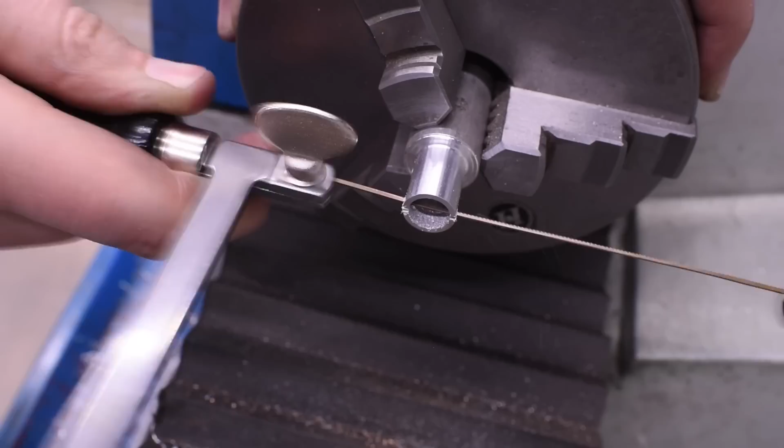This is either genius or stupidity. Where are you going to put your money down? It's stupidity, isn't it? Fine, I guess we'll see.

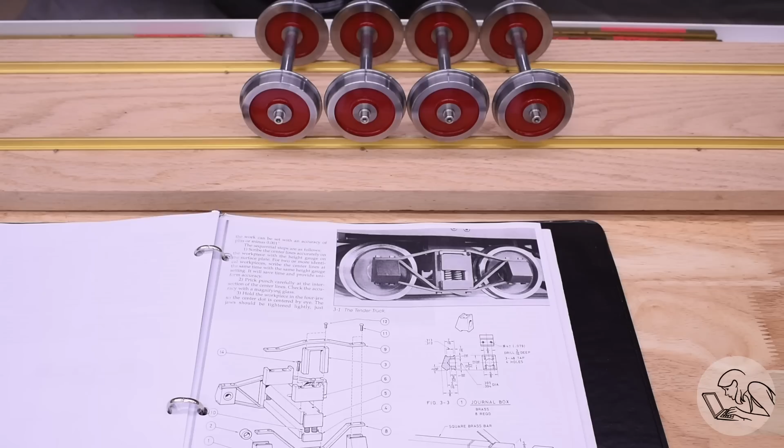I'm back on the Pennsylvania A3 switcher this week, and I'm continuing the journey towards a rolling chassis for the tender. So, let's go. With the wheel sets done, it's time to work on the trucks. Now, I believe the Brits would call this a bogie, which is probably a better word for it. It's the assembly that holds the suspension and the axles and the wheels together.

Here in North America, we call it a truck, which is perhaps unfortunate because we also call this a truck and this a truck and this a truck, and well, sometimes it's a verb. So, we like to overload words over here.

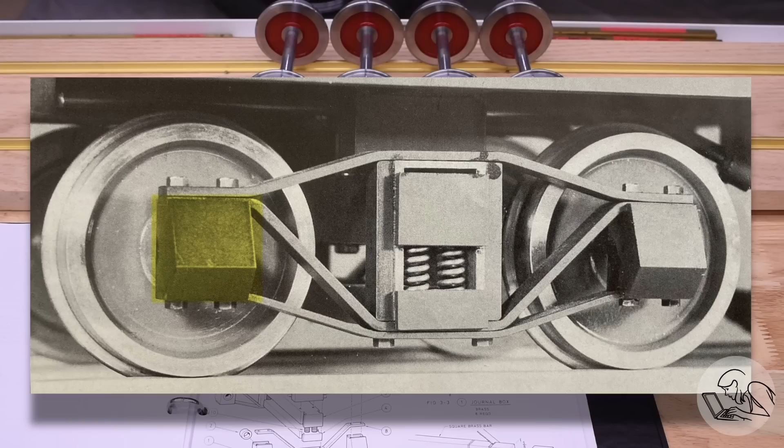I'm going to start with the journal boxes. They look like this. It's basically a box that holds the wheel bearings on a typical railroad car of this era. Now, these ones are mostly decorative other than being structural. However, on the real thing, they would be boxes that you could use to access the bearings for greasing or oiling. They might have an oil reservoir in them, that sort of thing.

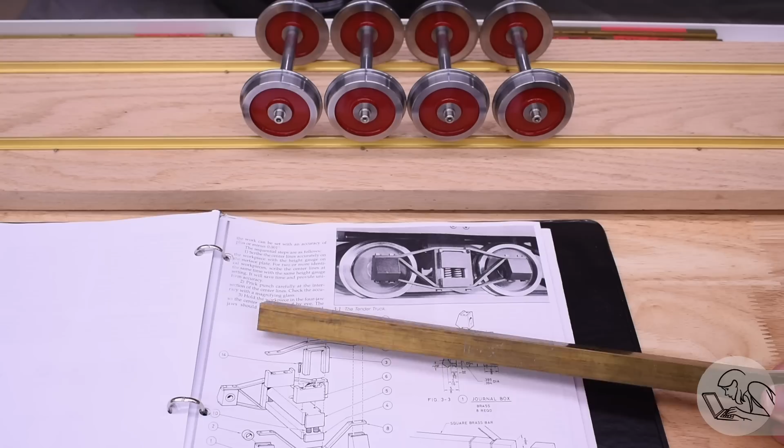I've got this brass square bar for the purpose, and we need 8 of them, of course. I'm going to say it'll be nice when the tender is done and I can stop making 8 of everything, but we're still in that world, so here we go. I'm going to rough cut 8 of these pieces on the bandsaw, and then they will need to be machined down to an accurate length over here on the milling machine.

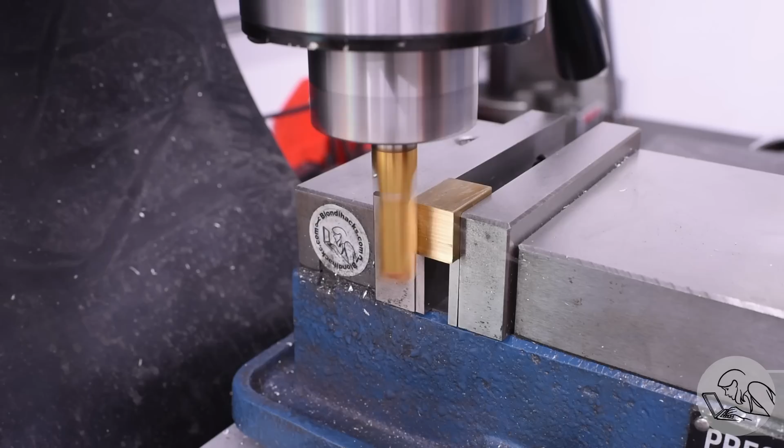Since I am still in the land of making 8 of everything, I'm going to be doing a lot of this sort of thing. I've got an end stop set, so after machining one end of the first piece, then I machine the second end of that first piece down to an accurate dimension. Once this piece is machined down to the exact right dimension, I can just zero the DRO right there and then run all the other pieces through. So I only have to measure the first one.

I have to sneak up on the dimension and take my time on the first piece, but then the other 7 go very, very quickly because it's just a case of facing one side, put that side on the end stop, flip it around, and machine the other side down to 0.

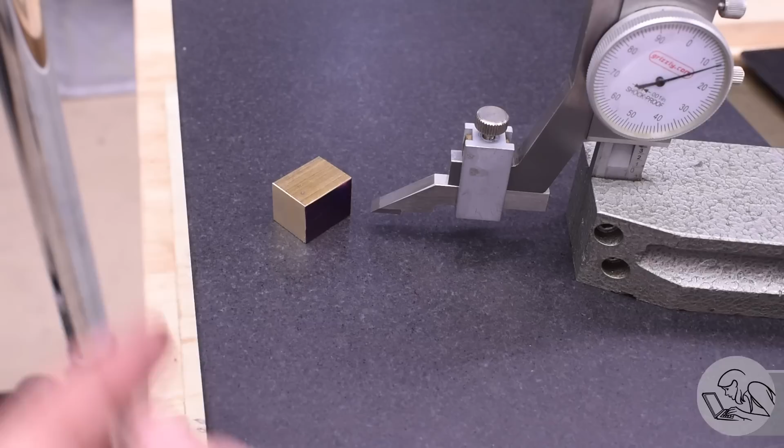Next is the bore for the bearing. It's a shallow blind hole, and this goes on the center of one of the long sides. So to mark the center of each of the long sides, I've got my height gauge set to half the distance of the short side, and I mark one axis of the center line on all 8 parts. Once again, trying to minimize tool and instrumentation changes.

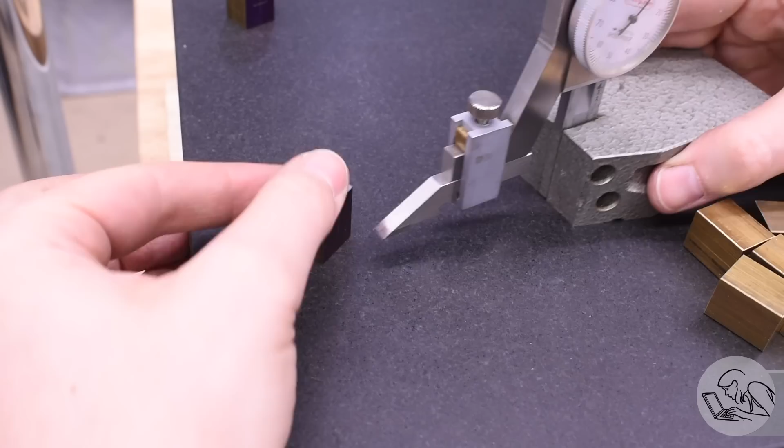Then I set the height gauge to half the long distance and run that through all 8 parts. This is a quick way to mark the center of all 8 parts. I really enjoy surface plate work, and I love any excuse to do it. To punch those center marks, I'm going to use an optical center punch. This is something I've had in my drawer for a long time. A viewer donated it to me, but I haven't used it a whole lot, so I thought it would be fun to give it a whirl here.

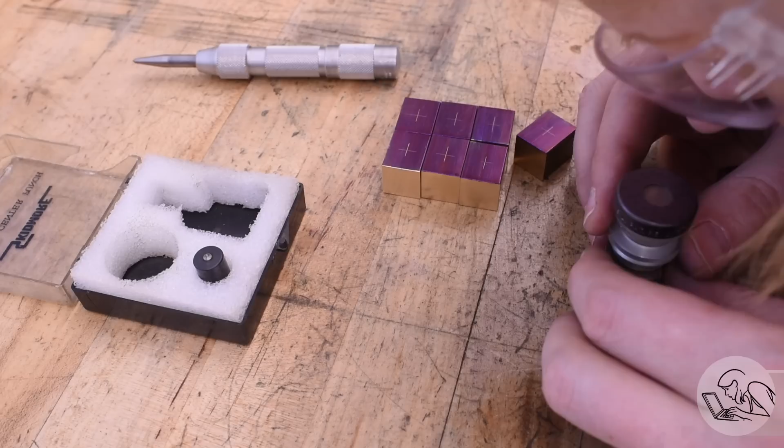The way these work is there's a collar that holds an optical loupe, as you see there, and inside that loupe is a crosshair. And the idea is you put that crosshair on the center of the scribe lines that you've marked. Here you can see what that looks like inside the lens. The white cross is the scribed marks on the piece, and the black cross is part of the loupe. So you line up the black cross on the white cross.

Essentially, you fill in the white lines with the black lines, and that loupe is now perfectly centered on your scribe marks. Then, trying not to move the collar, you carefully remove the loupe. This is easier on ferrous parts because the collar is magnetic. Then you insert this little transfer punch that the kit comes with, give that a tap, and now your center is marked. This is intentionally a light-duty tap, so it's just a starting point, but it should be very, very accurate.

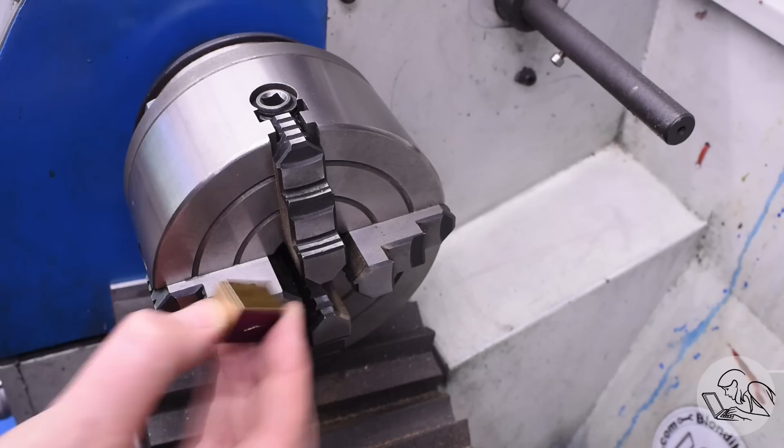It's trading accuracy for power. Then you deepen that punch with something like a spring-loaded center punch, and now that's ready to use. So I ran through all 8 parts to find the center that way, and now I can put them up in the lathe and get ready to do the bore.

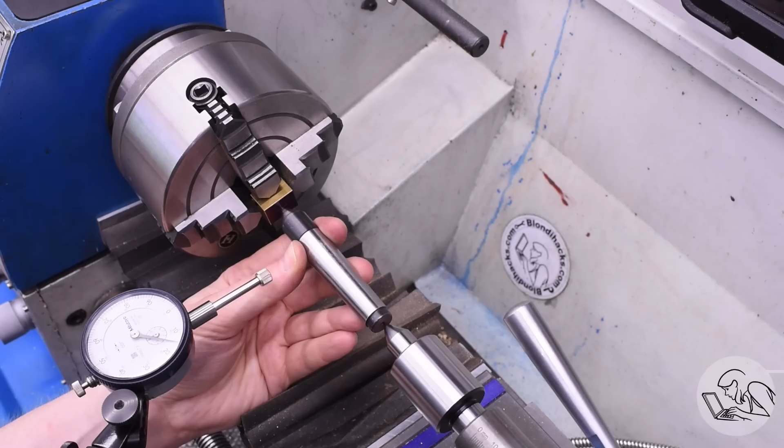Now I need that center punch on the center axis of the lathe. For that, I've got my dead center, which I put in the punch mark. I hold the back of it with my live center, and then I can dial in the dead center just as though it was a round piece of stock in the four-jaw. This is a simple technique for centering a punch mark that works extremely well. You'll see as it spins up here how well that punch mark is centered.

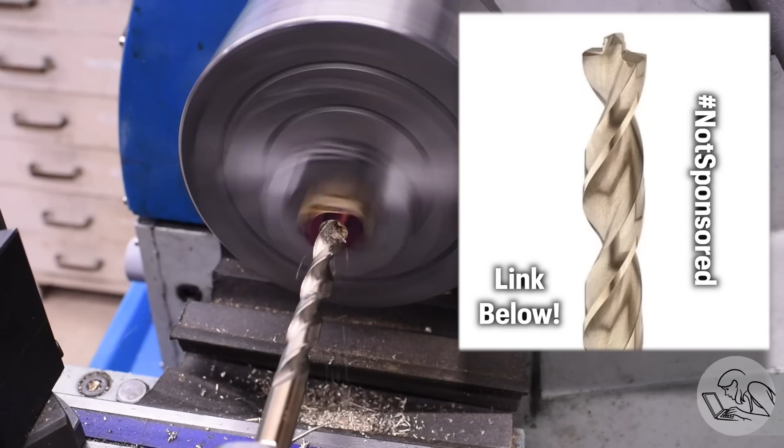Now I can center drill and then drill out this counterbore that we're going to be forming. Now for the drilling, which is to remove the bulk of the material and make room for the boring bar, I'm using a very special drill. This is a DeWalt Pilot Point drill, which has a mostly square grind on the end. These things are great for starting flat-bottomed blind holes because they have that square grind on them and they really save you a lot of work with the boring bar.

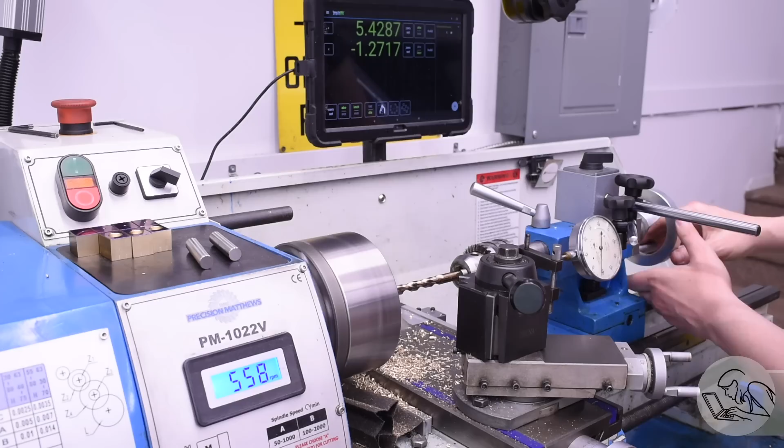Drilling depth is super crucial here, so you see me using an indicator on the tailstock quill to make sure I get my depth really accurate. And then it's just a matter of coming in with the boring bar and cleaning up that bore, bringing it to dimension. We also gain all of our concentricity back that we may have lost with the drill by doing this.

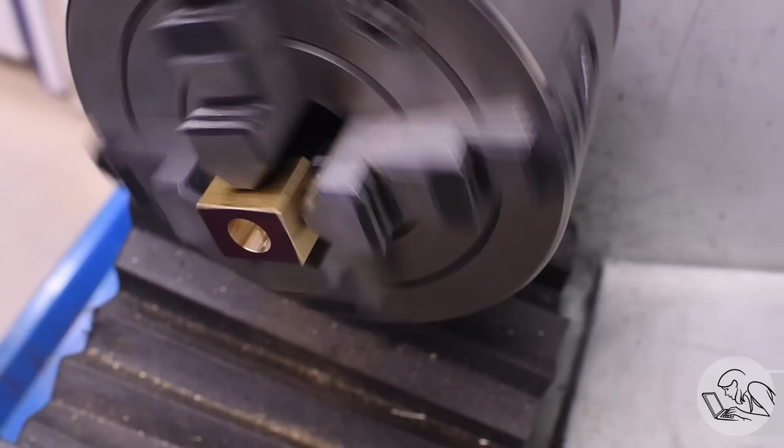Tolerance is very tight on these. They have to be accurate, so I'm using gauge pins. I have a couple of sizes leading up to the dimension that I want, and I'm taking light cuts with the boring bar and checking with my series of gauge pins, working my way up to the final dimension until I get a nice, comfortable fit on the dimension that I want.

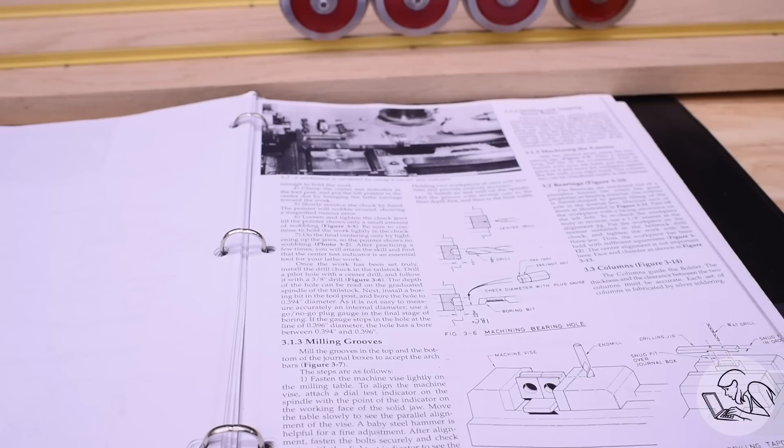And then, of course, as you know by now, I then have to do this 7 more times. There's the 8 journal boxes brought to this point, and now we're going to be spending some quality time over on the milling machine. The next features to do are grooves top and bottom for holding the arch bars. That's part of the structure of the truck. I'm going to do this on the mill, of course.

I've edge found on the back edge only. That's the only reference I need. Referencing from the back of the part is a conscious choice because that's the fixed jaw of the vise then that you're referencing effectively, and that will ensure maximum repeatability between parts. Again, when you're making 8 of something, that does matter. And I've got an end stop, of course, although for this particular feature, the end stop isn't strictly necessary.

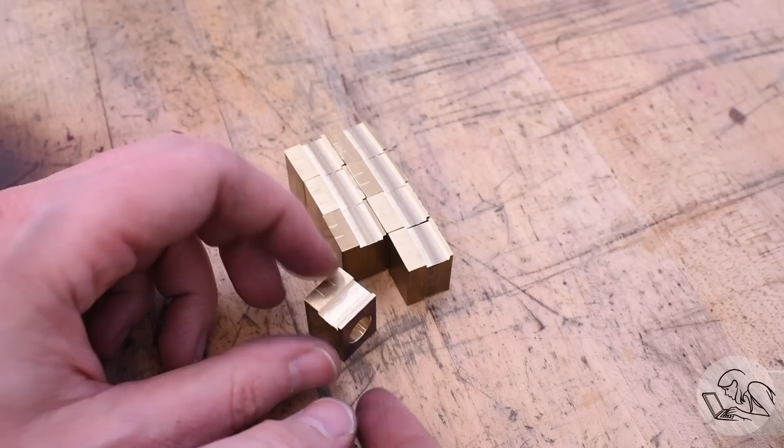And I run through all 8 parts once again, putting a little groove, in this case, on both ends of the part, because the structure of the truck attaches top and bottom to these journal boxes. So I have to do this 16 times. Those 2 grooves add 16 edges to each part, so now I get to spend some quality time with a safe edge needle file to deburr all those edges.

And this is important because if you've got burrs everywhere on your parts, then on the next series of operations, you're going to have burrs getting trapped between vise jaws and up against end stops and so on, and the accuracy and repeatability of your subsequent fixtures and setups is going to go to heck in a handbasket.

Next up is a whole bunch of tiny bolt holes to attach the journal boxes to the structure of the truck. We need 4 of these per journal box. They have to be accurately depthed because you don't want to break into the journal bores. And because the holes are shallow, we need all the threads that we can get, and so each of these holes requires taper tapping and bottom tapping.

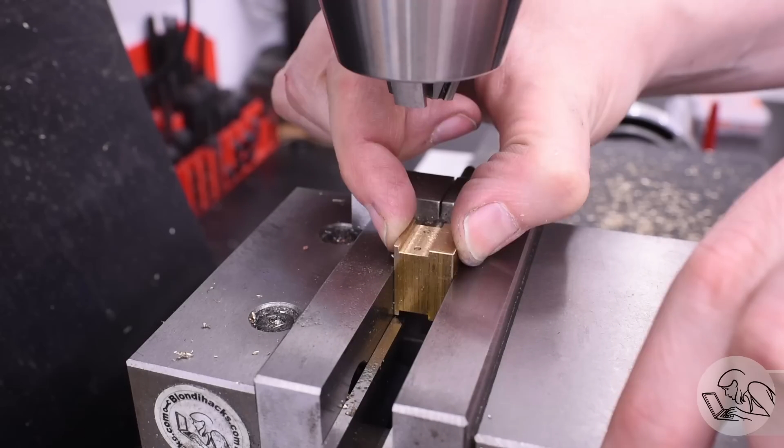So that's 64 tapping operations that we have to look forward to. Once again, I'll be glad when I'm not making 8 of everything. For a process like this, you really want to be thinking about efficiency. So in my case, I'm doing the center drilling and tap drilling for one side of one part first.

Then I flip the part over, do the same thing on the other side of the same part. Then I do all 8 parts that way. Then I come back in and do all of the tapping. This strikes a balance between tool changes and part changes.

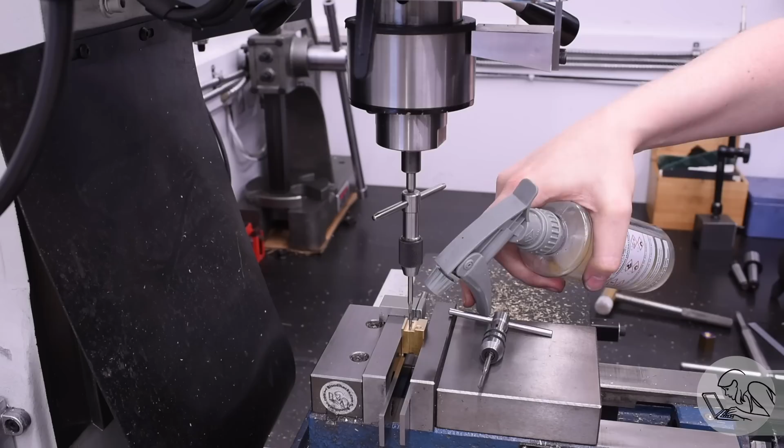Part changes take some amount of time and tool changes take some amount of time, and you need to decide which of which you want to do the most of. In this case, switching drills is fairly quick because I don't have to move the head to do that for these 2 drills that I'm using, whereas switching to the tap is quite time consuming because I have to move the head up and down switching between tapping and drilling. So that's the balance that I struck here.

And note that the end stop on the vise is crucial to this because it means I can swap the parts as much as I want and not lose any accuracy. A simple vise end stop like you see me using there is an extremely powerful tool for mass production and repeatability. That vise stop is shop made. I have a video on making that if you're interested in making one yourself.

On now to the angled features. For this I'm going to need a couple of fixtures. I've got this stuff here. This is called Mic 6. It's basically aluminum gauge plate. It's Blanchard ground on both sides to be very flat and a very accurate thickness. Making fixture plates and such is exactly what it's for, and it's super nice stuff to work with.

I absolutely love it. I marked and bandsaw cut a piece of it, and I'm going to clean up all of the edges. Because the front and back are already ground parallel and flat, it really saves you a lot of time because you can do a setup like this where you simply mill all 4 edges and you don't have to do any trickery with copper wire or so on like you normally do when you're squaring up stock. It really saves you a lot of time. So you can square up all of the edges of your soon-to-be fixture plate, and everything's going to be accurate, and you can use it for references for implementing that fixture.

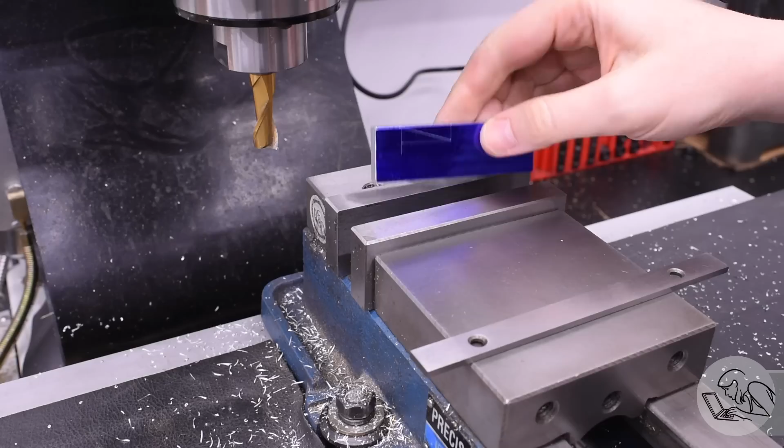Kozo helpfully provides the dimensions for the angle required for this fixture as a rise and run, or slope if you will, so that's easy to transfer on to the piece with layout. Now to get a parallel cut at an angle that follows that line, this is my favorite trick for doing that. Put a parallel on your vise jaw, line up the scribe line with the parallel, remove the parallel, and now you can mill down to that line without hitting your vise jaws. This is more than enough accuracy. We don't have to get out the sine bar or anything to set up this angle because these are just decorative faces on the fronts of the journal boxes.

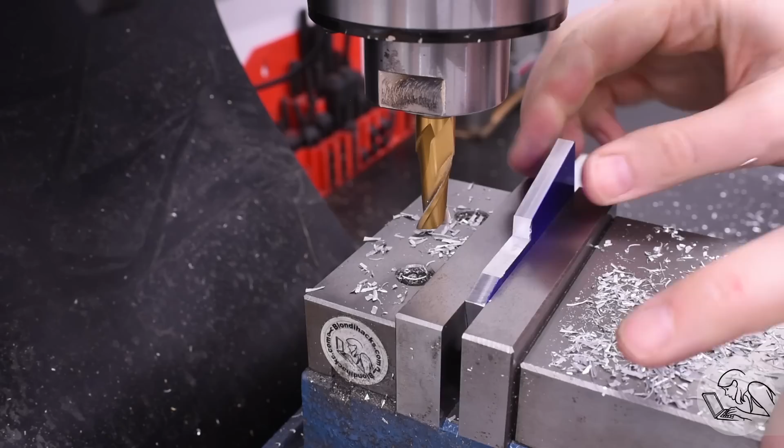That little notch will hold the pieces at the correct angle for the larger face. Then for the smaller angled face underneath, I need another notch, and that's at 45 degrees. So I've got one of my little 45-degree angle squares in the vise that I use to set the piece at this angle. Then it's just a case of side milling my way in until I've got a depth for that angle that looks like it'll hold the block comfortably. I need to make sure that I've got enough meat in the fixture that I'm not landing on the middle of one of my grooves or something like that. I have to have a secure fit that will hold the piece.

One last detail that I think often gets overlooked in fixtures like this is an undercut on those inside corners. Anytime you have an inside corner in a fixture, you have to undercut it. No matter how sharp a cutting tool is, there's always a nose radius on it, so that means you're going to end up with a fillet in that inside corner. It might be too small to see, but that fillet is always there. And that fillet will prevent parts from seating properly down in that inside corner. So with that undercut, as you see here, now the part is guaranteed to be sitting perfectly down in the corner on all sides. Only takes a second to do that, and it absolutely transforms the security and the repeatability of a fixture like this.

Now it's very quick and easy to tap each piece down into the fixture, and it's guaranteed to be held at the correct angle for milling flat to create the angled surface. You saw me using a reference for the end of the vice jaw to set the position of this fixture horizontally. That actually isn't important, that's just a force of habit. I always do that just in case it matters, but for this fixture it doesn't matter because the end of the part is held as well by the fixture.

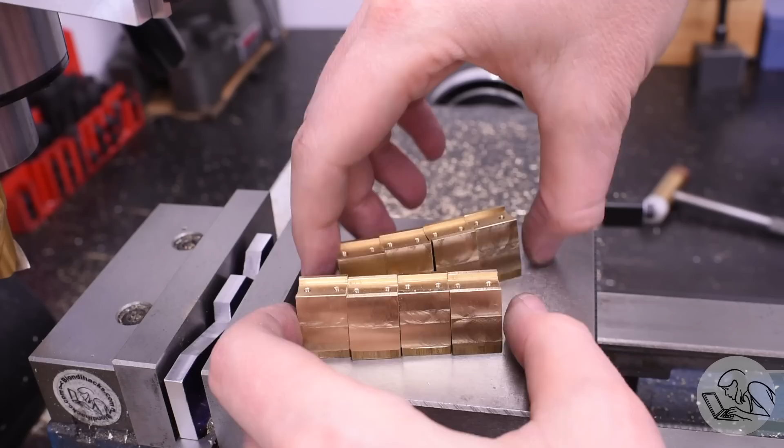The drawing gives me 2 dimensions that I'm aiming for: the thickness of the little edge and the width of the unmachined remaining surface. First one done, and everything looks good, so I 0 my DRO there and run through the other 7. Next, I run through all 8 again using the same method, this time on the other notch in my fixture to add the smaller 45-degree chamfer on the bottom of each of the journal boxes.

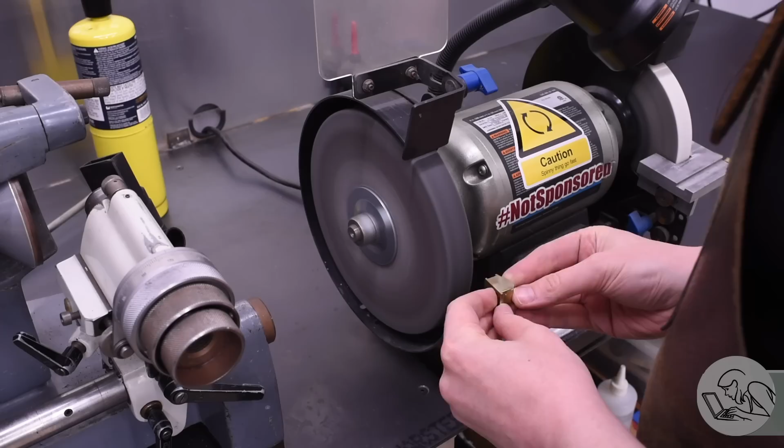Easy peasy. 3 of the surfaces are still unmachined. They remain the factory stock surface, and those surfaces never look that great, so a little time with the Scotch-Brite wheel shines them up a bit. There's all 8 pieces there. They're looking pretty decent. I do have some jaw marks from the chuck on a couple of sides, but I managed to get most of them out with the Scotch-Brite wheel, and they're going to be painted, so I might fill those as well. On to the bearings.

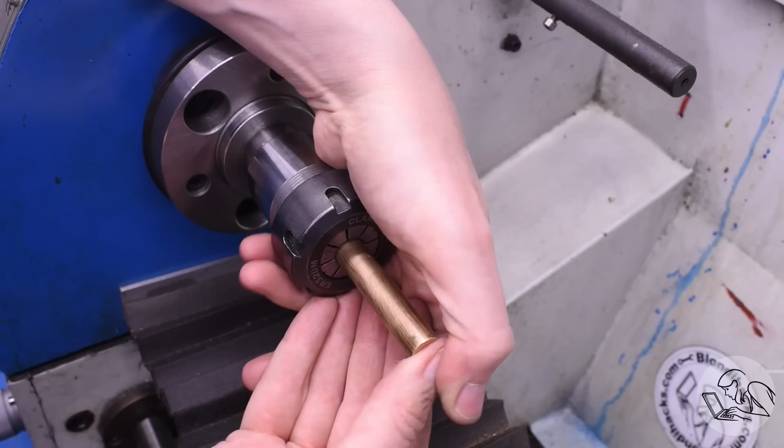I have some phosphor bronze for this. These bearings are deceptively cool. They're not just basic bushings, they're actually barrel-shaped, and you'll see why at the end. It's a very interesting design. I'm still the mayor of the land of 8, so more mass production. I'm going to start by roughing in each bearing as a simple cylinder, and we'll add the tricky barrel-shaped features later.

Per usual, the first one is a lot of sneaking up on it, making sure the dimensions are exactly right. The tolerances again on this are very tight. Has to be a good sliding fit on the journal box. And then of course the hole down the center needs to be a very close running fit on the axles. But some basic drilling and reaming gets that done. Once I've proofed with some test fitting on the mating parts that I know my dimensions are good and my choice of operations is sound, then I can once again run through the other 7.

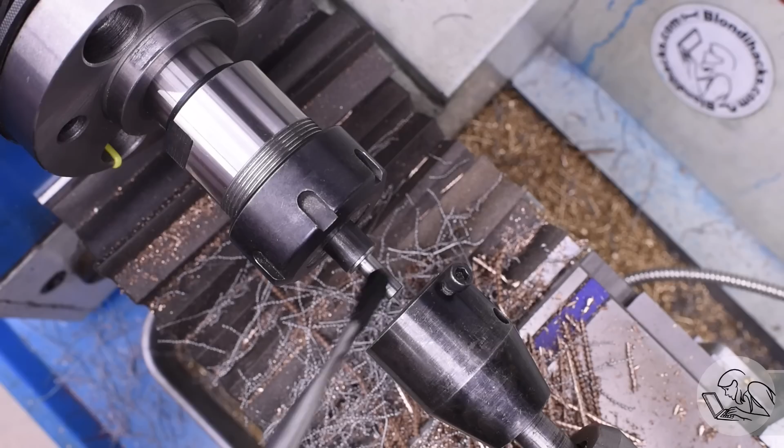And again, I can use the DRO values to repeat all 8 of these without needing to measure anything after the first one. I parted each one off long, and then I was supposed to go back and face each one down to length in a new fixture. However, I forgot to do that, but more on that in a second. Then the remaining features are done on a mandrel, again for easy repetition. I need a taper on both sides of every bearing, which would be a lot of compound setups. So a mandrel will save me a ton of work, as you'll see.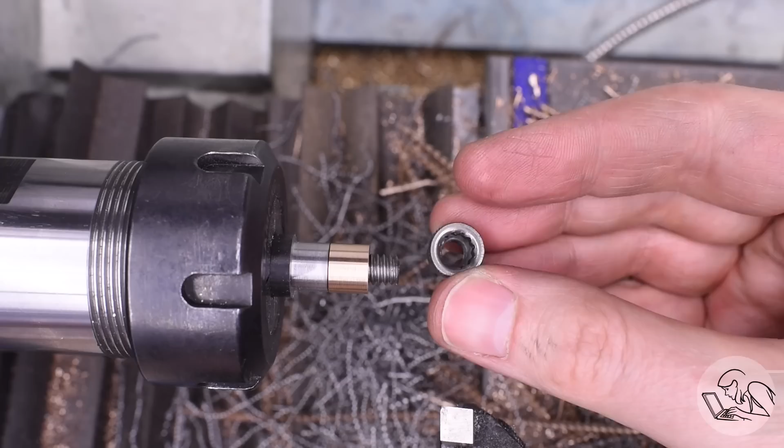I turn that down to size, I put a thread on the end, and then once the thread is on the end, I turn down the reference area to the exact size required for a very, very close fit on each of the bearings. To secure those, I found this weird little thumb screw in my hardware bin. I have no idea what it's from, but it happens to have the right thread on it, and it will be a handy way to secure each of these bearings in place.

The diameter of it is a little bit large. I need it to be smaller than the final bearing will be, so I just put in a left-hand turning tool and turned down the body of this thumb screw to size. You could also use a very small nut or something along those lines, but I found this thing in the bin, so might as well use it.

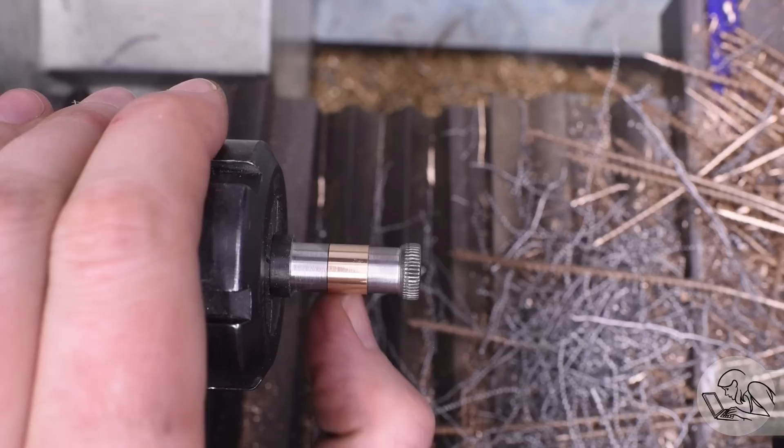Now, as you can see, it's slightly smaller in diameter than the bearing, and I can turn the taper on the end. And I mean, if I cut into that nut there a little bit, it's fine. That thing can be considered sacrificial.

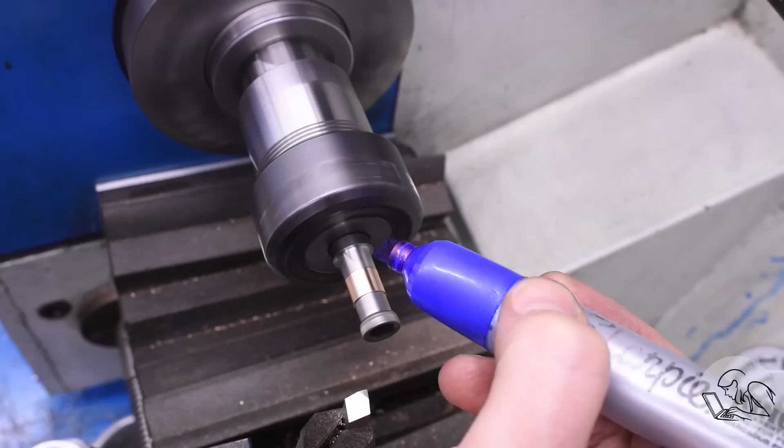To create the barrel shape, each end of the bearing needs to be tapered to 3 degrees. So with a protractor, I'm setting my compound at 3 degrees, and I'm going to blue up each part as I go, which is going to help me get the dimensions accurate for where the taper starts and ends. That's a tricky thing to do with tapers.

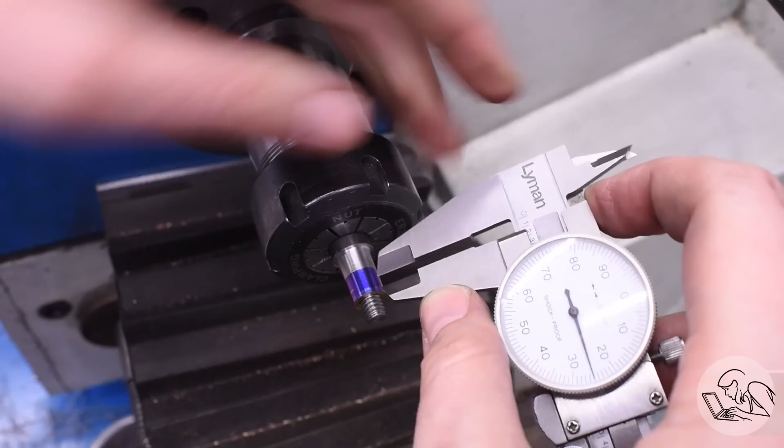Using my calipers to make a light mark in the bluing, I'm not scribing the material here, just marking the blue to give me the high end of the taper. And then I'm going to determine where that ends up being on the DRO by trial and error. This is very similar to how the wheels were done, if you may recall.

I do light cuts from left to right until I land right on my line, and then for all remaining cuts I will know where the DRO value is for the start of that taper. Positioning tapers accurately on a part, especially for very, very small parts like this, can be very difficult. But this is a simple method to get very good accuracy, certainly accurate enough for what we're doing here.

For each pass, I start by zeroing the DRO for the cross slide and the carriage, and then I've zeroed the compound hand wheel at that position as well, so that when I have the accurate taper right up to my line, then I know with everything zeroed, it's the correct place to start.

This is the moment where I realized I'd forgotten to face these parts down to length first, so my reference line for that taper was incorrect. That's okay though, we haven't scrapped that part, as you'll see. So I'm just going to switch gears, I'm going to pull out the collet chuck, but leave my mandrel in it, so I don't lose the concentricity on that mandrel.

Bring in my 3-jaw chuck, and I'm going to turn a quick fixture to hold all of the bearings to face them down to length. I'm not losing any time here because I was going to have to make this fixture anyway to do the facing. I start by drilling out a rough dimension for the mandrel, and then I bore it out to final dimension to get concentricity and to create a little shelf in the back of the bore. It's going to give me a depth reference for these parts, as well as holding them concentric to the lathe.

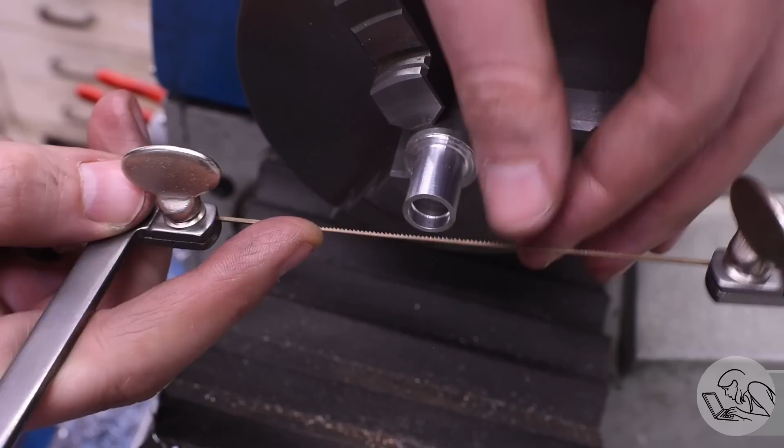Once again, like on the journal bores, I'm working to a set of gauge pins to get that dimension set. Now the bearing is a very, very close fit in there. I can just press that bearing in. That's what I want. Very close fit is going to ensure concentricity of the fixture.

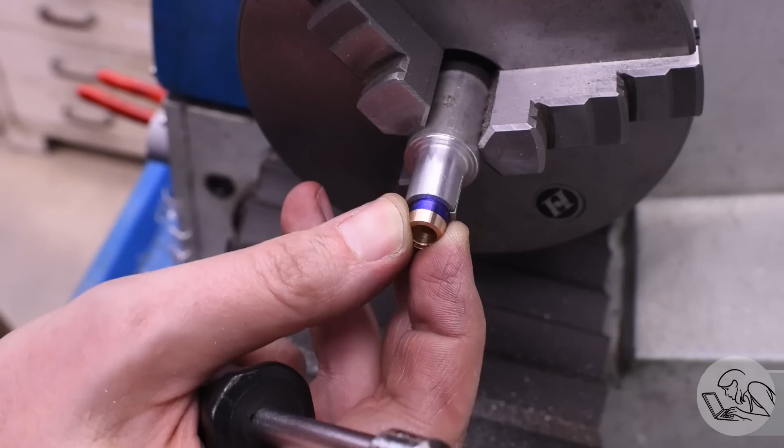Now I do a slit down the center of the fixture with a fret saw. This does not have to be accurate, hence the ham-fisted sawing. This goes all the way down basically to the depth of the drilling that I did. The longer these slots are, the better, because they'll give it more flexibility. I think you see where this is going now. I'm basically making a 5C collet from scratch.

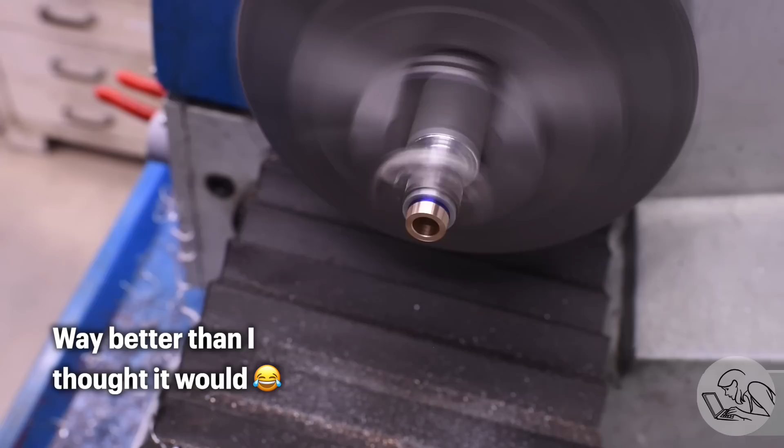Now to close that collet, I'm going to use a precision Starrett machinist's hose clamp, or a farmer's collet closer if you like. And that works way better than you might think it would. That works extremely well, as you can see. That's running very, very concentrically, and this very tiny part that's a very strange dimension is held perfectly accurately.

And the great thing about this fixture is it repeats incredibly well on depth and concentricity. So it's very, very quick to run through all 8 parts, and I've got the depth set on the DRO for the final length of each part. I don't have to measure a single thing, and I was able to face down all 8 parts very, very fast. So strong recommend for this type of quick and dirty emergency collet.

As before, I left that fixture in the chuck just in case I need it again. I won't lose my concentricity. Now I can switch back to the collet chuck, which has my mandrel in it, and as you can see, I have lost no concentricity from that little detour. Now I can recut the taper on that first bearing that I did wrong.

Because the bearing was overly long, the error worked in my favor, and I didn't actually scrap the part. I can just recut the taper using the same DRO values, mind you, because my reference edge is still the same. The reference edge against the back of the mandrel was correct. So my DRO values are still correct. I recut that initial taper.

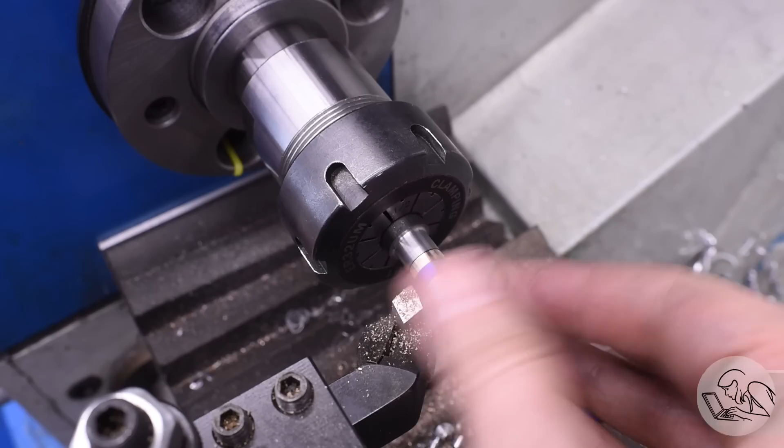Now I can flip the part around and cut the second taper, and it will be perfectly symmetrical with the first one. And I can run through all 8 bearings this way very, very quickly. And the great thing about this is I get both tapers on both sides of every bearing without ever touching my compound. I set that 3-degree angle once, and all 16 angles are guaranteed to be identical.

If I did my job right, you'll see a 20 thou wide band in the middle of blue that remains. That little band in the center is crucial because that's the running diameter of the bearing. That's what holds it in place in the journal box. So we need that, but the barrel shape on either side is what allows the axles to tilt. That is why we've made them barrel shaped. You'll see how this all goes together in a sec.

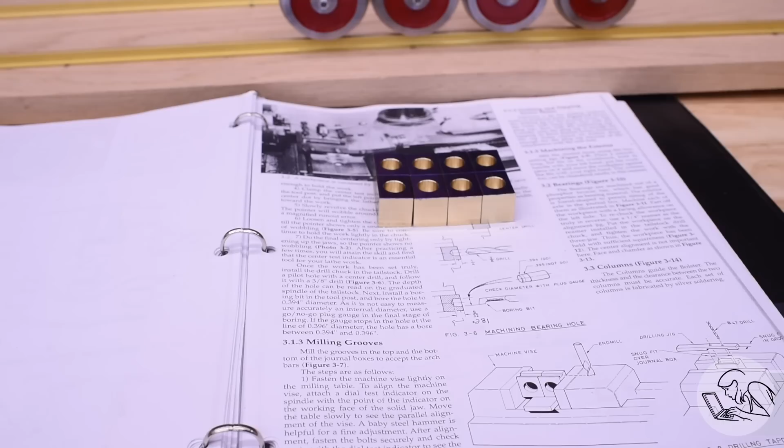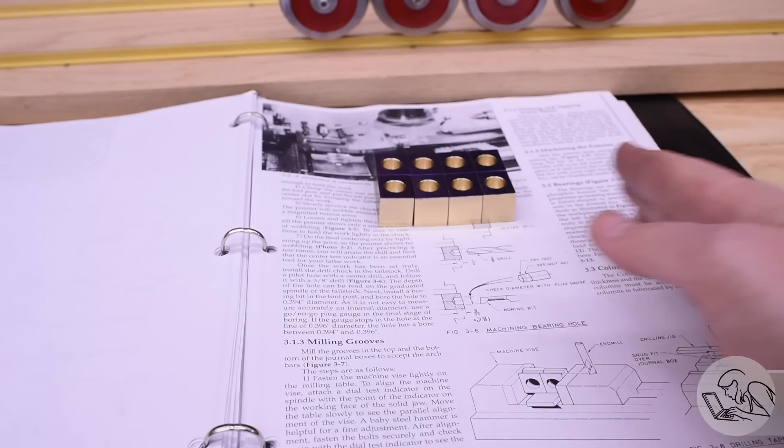Mea culpa time. I actually made all those journal boxes to this point twice because I put the counterbore in the end instead of the long side, and I had to make 3 extras because 3 of those incorrect bores were oversized. So I scrapped 11 parts getting to this point. Yeah, I didn't show you all that because it wasn't an interesting set of errors.

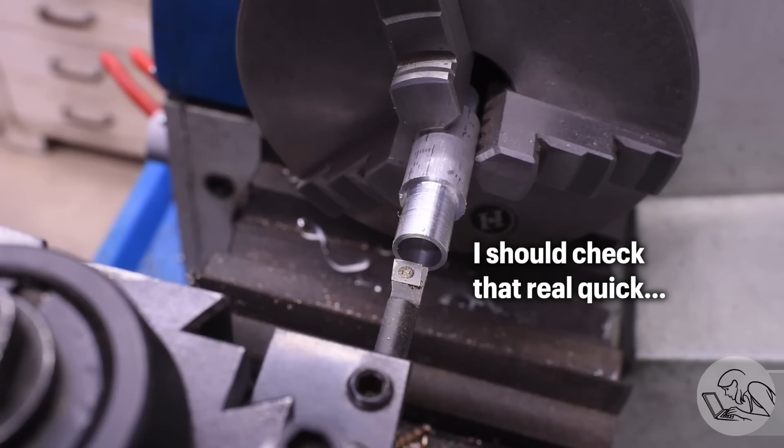Also, that super cool mandrel, I made that twice as well because the drill cut oversized the first time and I blew that dimension. So just so you know, I don't show you every tiny thing that goes wrong, but machining teaches patience, and don't be discouraged if you have to scrap parts or even mandrels sometimes. Just keep working through it and you'll get better at this stuff.

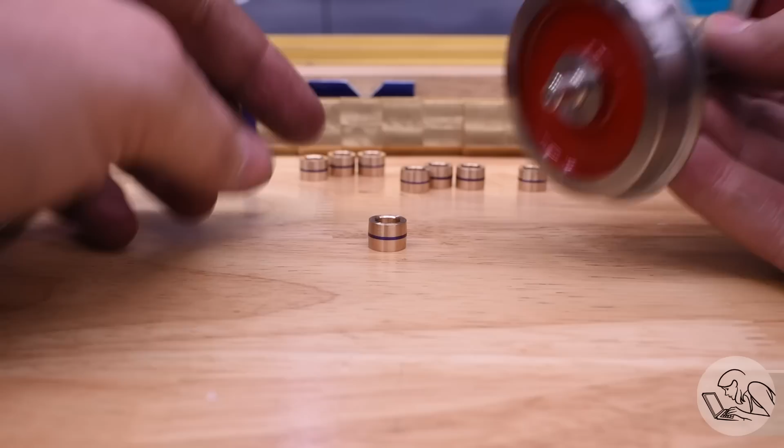Final assembly time. Let's see how this all goes together. You'll get to see why the bearings are barrel shaped now. The bearing goes on the end of the axle like so, and then that assembly fits into the journal box. The journal box is what attaches everything to the frame of the truck, the arch bar frame.

And now, as you can see, the journal boxes have tilt in them. That allows the axles to tilt to follow the track. So this is a crucial part of the suspension system of a railway car, that ability for the bearings to tilt. It's all about suspension. Rails are never perfect, and if you can't follow the rails like that, then you will derail.

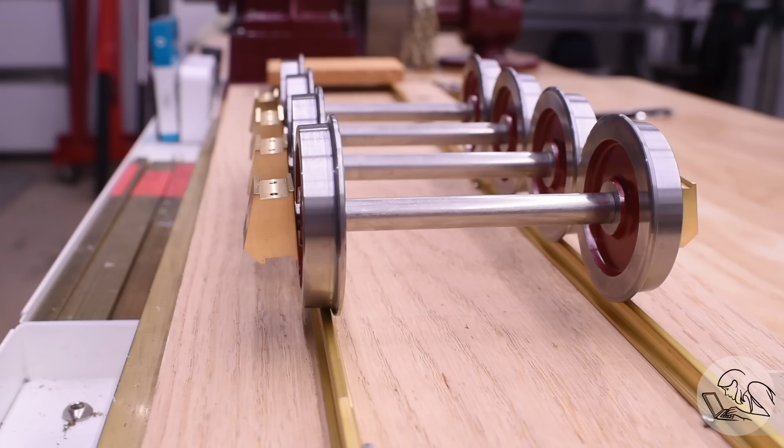Quick mock-up then of all 8 of them, and you'll see kind of how things are going to look. You can imagine those pairs of journal boxes joined with truck frames, and soon they will be trucks. You can see them kind of sitting at an angle as they sag under their own weight from that tilting action, but of course eventually they'll be joined to trucks, and so they'll be sitting on the center band of the barrel shape that you saw earlier.

This looks fine, I guess. This is certainly what they're supposed to look like, but those large flat surfaces on the outsides of the journal boxes were nagging at me, and I slept on it for a couple of days, and then I had an idea for a last-minute addition to give these things a little more detail, make them look a little more interesting. The original purpose of a journal box, of course, is to give access to the bearings that are inside. So there would prototypically be a hatch or some other way to access the bearings inside for maintenance and lubrication.

So I set them up in the mill once more and did a little bit of work with an engraving bit, and this is the result. I have the sort of impression of a little hatch or a door of some sort on the front of each journal box. I think this is a nice addition. What do you think? Well, there you go.

That is all the time I have for you this week. I hope you enjoyed watching the fascinating process of making journal boxes and bearings for a railroad car.